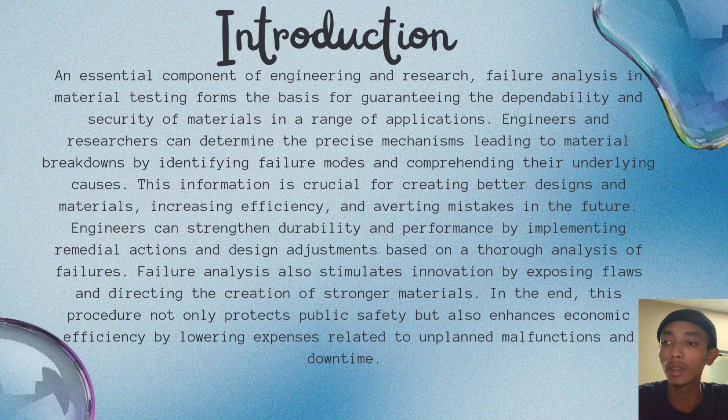In the end, this procedure not only protects public safety but also enhances economic efficiency by lowering expenses related to unplanned malfunction and downtime. So we move to common failure modes. The first point is fatigue. The description: it occurs due to repeated cyclic loading. As an example, aircraft wings and engine components develop cracks over time due to the stress of takeoff, flight, and landing cycles.

The second point is fracture. The description is sudden and catastrophic failure, often caused by flaws and stress beyond the material strength. For example, glass windows shattering from impact or pressure, and brittle ceramics breaking under high stress. Then we move to the third point, corrosion. The description is gradual degradation of material through chemical reaction, often involving moisture and oxygen. As an example, rusting of steel structures like bridges and pipelines, leading to weakening and potential leaks.

Point number 4 is wear. The description is erosion of material surface due to friction and mechanical action. As an example, automotive brake pads and engine parts wearing down over time, necessitating regular replacement. And number 5 is creep. The description is slow, time-dependent deformation under constant stress, typical at high temperatures. As an example, turbine blades in jet engines deforming under prolonged high temperature conditions, affecting performance and safety.

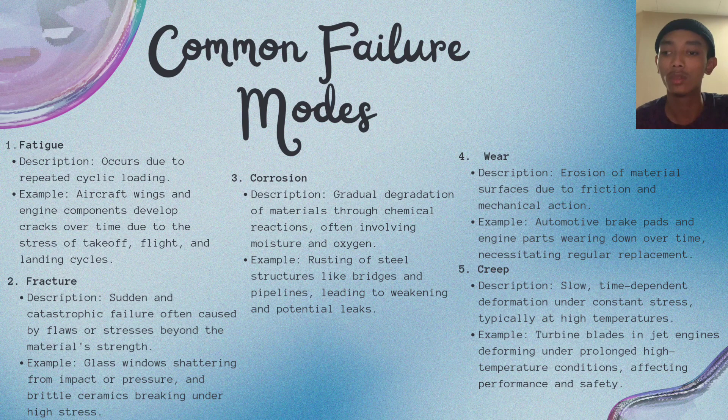Today I am going to present to you about testing techniques for different types of materials. So there are 5 types of tests for different types of material. The first is tensile testing. It measures material strength and ductility. The failure mechanism identified was yield strength, the point where material begins to deform plastically. The second one is impact testing. The purpose is to assess material toughness and impact resistance. The failure mechanism identified was brittle versus ductile.

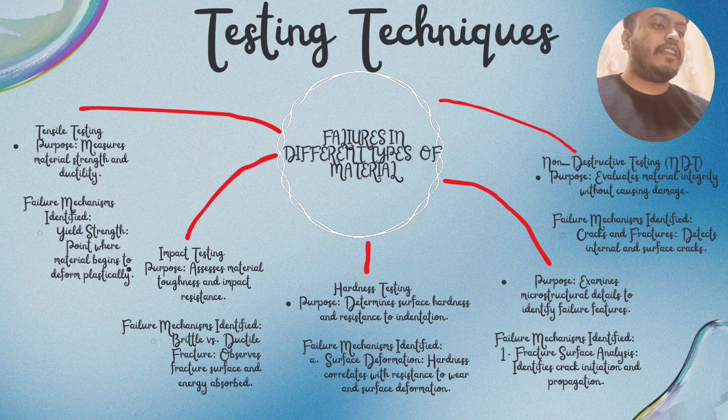The third one, hardness testing. It determines surface hardness and resistance to indentation. The failure mechanism identified was surface deformation. Hardness correlates with resistance to wear and surface deformation. And the fourth was non-destructive testing, NDT, which evaluates material integrity without causing damage. The failure mechanism identified was cracks and fracture; it detects internal and surface cracks.

Okay, now moving on to the steps taken to identify the failure cause in the case study. There were 5 steps that have been taken. The first one is TGA. We used TGA to analyze the thermal stability and composition changes in the material under different temperatures. The findings suggest that thermal degradation was not a primary factor in the failure but helped to understand the material's behavior under varying environmental conditions.

The second, initial investigation: we conducted a site inspection to gather physical evidence from the collapsed structure. For the findings, we noted that the failure initiated at a single point on the bridge. The third one is OM, optical microscopy.

Utilize OM to visually inspect the surface and structure of the collected eyebar samples. For the fourth one is SEM, scanning electron microscopy. Perform SEM analysis to examine the detailed microstructure of the IBA material.

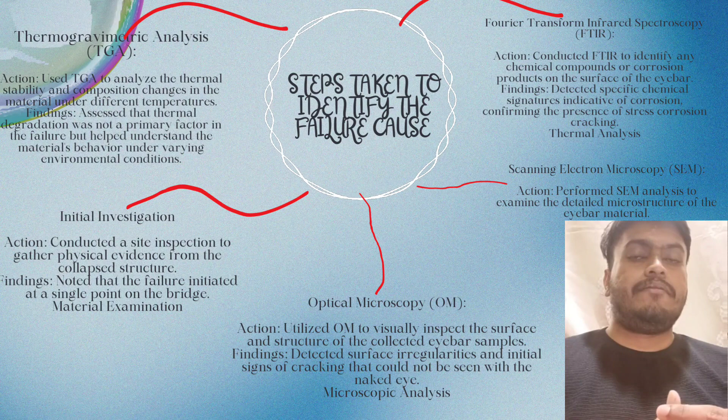The root cause in the Silver Bridge case study collapse involved a systematic approach using various methodologies. Initially, failure mode and effects analysis (FMEA) was employed to identify potential failure modes, with stress corrosion cracking and metal fatigue emerging as primary concerns. These were prioritized due to their severe impact on bridge safety.

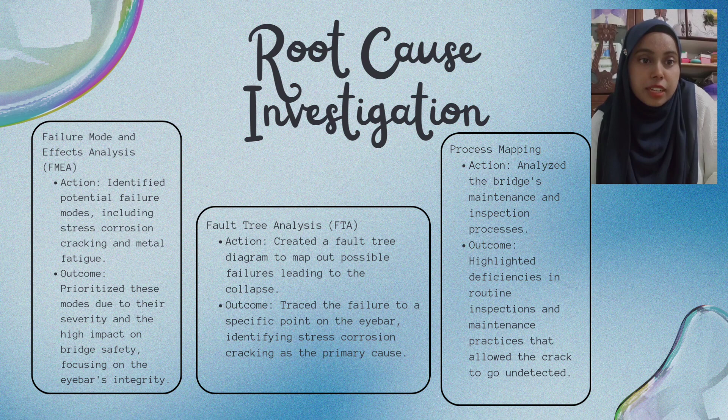Fault tree analysis (FTA) was then used to create a detailed fault tree diagram, tracing the failure to a specific point on the eyebar, confirming stress corrosion cracking as the root cause. Additionally, process mapping was conducted to analyze the bridge maintenance and inspection procedures, revealing significant deficiencies. These routine inspections were found to be inadequate, allowing the critical crack to develop unnoticed over time. Combining these methods provided a comprehensive understanding of the factors leading to the bridge's catastrophic failure.

Next is the preventive measures based on the Silver Bridge case study. Based on the findings from the failure analysis, several preventive measures were recommended to enhance the safety and durability of future bridges. First, selecting materials resistant to stress corrosion and fatigue was crucial, ensuring that bridge components could withstand harsh environmental conditions and repeated loads.

Design modifications were also suggested, focusing on reducing stress concentration and improving load distribution by reinforcing critical elements like eyebars. Additionally, the inspection and maintenance protocols for bridges were significantly improved, incorporating more frequent and thorough checks to detect early signs of wear and degradation.

Rigorous quality control measures were implemented during the manufacturing and assembly of bridge components, ensuring that only high-quality materials were used and initial defects were minimized. These preventive measures aim to address the identified root cause and prevent similar failures in the future.

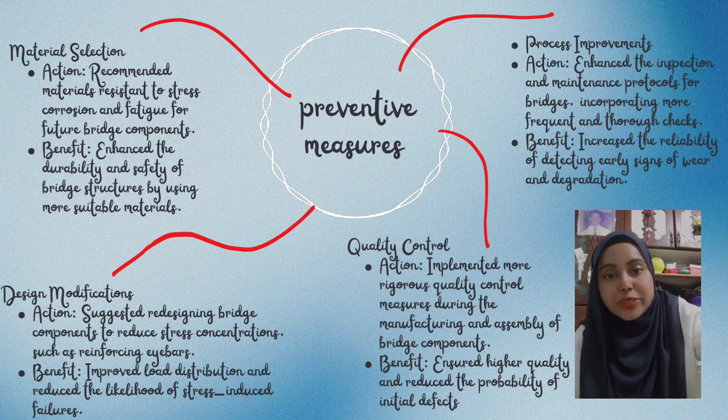My first point is sharing knowledge. The benefit is sharing findings from the Silver Bridge collapse with the engineering community to improve bridge design and maintenance practice industry-wide. Next, my second point is accessing real-world data. The benefit is using data from similar bridges and structures to understand common failure modes and conditions, enhancing overall safety protocols.

My last point is learning from practical experience. The benefit is applying lessons learned from the Silver Bridge collapse to develop new standards and regulations for bridge construction and maintenance. Thank you.

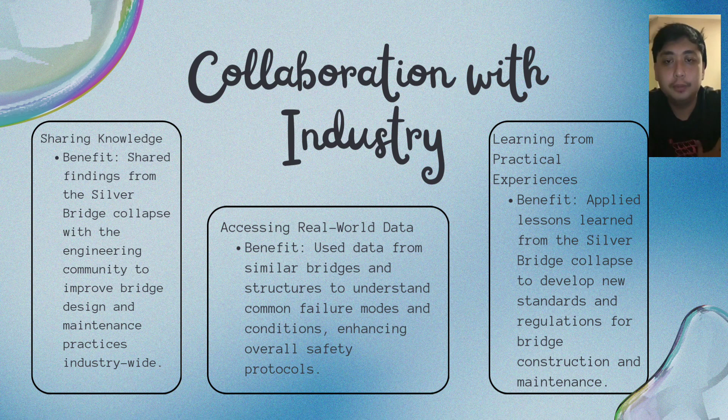Next is conclusion. First, importance of systematic analysis. The case study demonstrated the effectiveness of FMEA, FTA, and process mapping in identifying the root cause of the collapse, emphasizing their importance in failure analysis.

Second, implementation of preventive measures. Highlighting the need for appropriate material selection, design modification, process improvement, and stringent quality control to prevent future failures. Third is collaboration with industry, showcasing the benefit of sharing knowledge and data with the industry to enhance failure analysis practice and improve engineering standards.

Four, continuous learning and improvement. Reinforcing the necessity of ongoing education and adaptation in material engineering, using the Silver Bridge collapse as a learning opportunity to advance the field and prevent similar tragedies. Thank you.